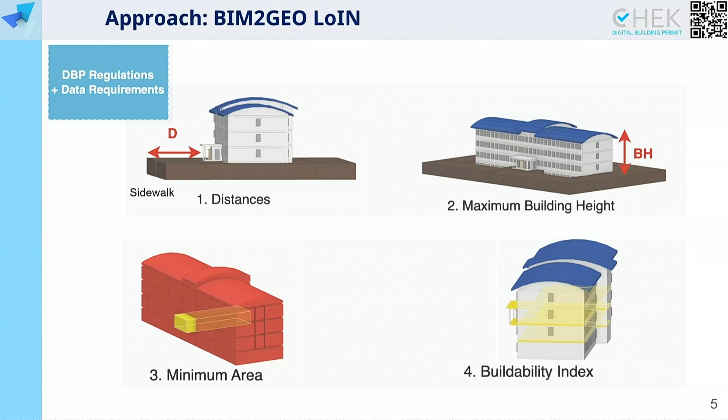So for that, we chose last year within the CHEK project, within University Brescia and Minho, to focus under the feedback of the community of practice of the project on 4 main regulations: distance to buildings, to sidewalks, the maximum building height within the 4 municipalities, minimum area, and the buildability index, which I need to explain more—like the potential of a land or building to the maximum usability. It can be translated as a data requirement based on the ratio of area to area, or volume to area, which takes the maximum usability of the building.

After this stage, we detected 5 concepts and 5 solutions in order to make this process implemented. The first is detecting the accuracy based on the tolerances of the 4 municipalities, urban ones, in order to detect what level of geometric detail is needed as input during this process. The georeferencing was made through my teammates' solution developed with IFC-GRF, which is a tool—I'll give you the links on GitHub. We also have a website where you can implement your IFC model. It supports the 4th version, 3.2, and you can georeference it based on the IFC map conversion to the city level.

We have the building envelope extraction, which is based on the voxelization approach. It approximates the envelope of the building to its accuracy, in order to extract the elements needed to compute the buildability index and maximum building height. One of the key elements checked until now are georeference accuracy, building envelope extraction, and floor extractions. The last two are space extractions for the minimum area, and facade alignments, in order to say to what accuracy the overhangs need to be extracted to align with the data requirements of the inputs. These two are still undergoing and not yet checked at the geometry level.

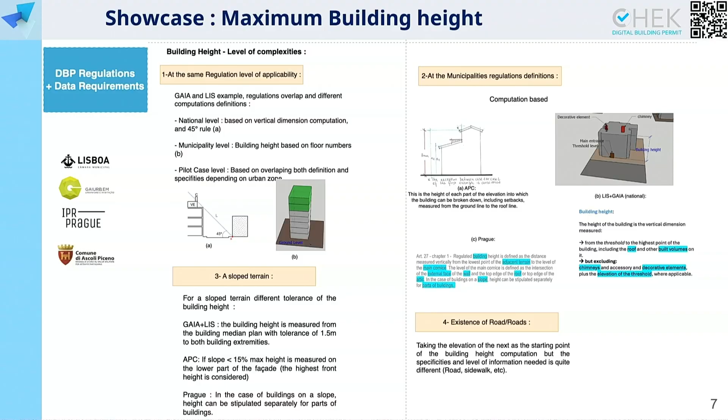What we detected is, for example, at the same level of municipality, you have an overlapping applicability of the regulations. You find out that the maximum building height can be defined either by the maximum floor levels, or by the computation from the lowest ground level elevation to the roof elevation. It can go beyond that in terms of complexity—whenever you have sloped terrain the approach is different, and whenever you have roads involved it becomes overwhelming. We chose one simple case for this study.

We had the example of the municipality of Vila Nova de Gaia, provided by one of our partners, the design architecture company Zvei, in IFC4. We checked specifically with my teammates how far the geometry is validated.

For example, here we can see how far we have these elements structured for the data requirement. We need to provide IFC walls, IFC wall standard cases, how far the IFC coverings are structured—not under proxy elements, but as IFC coverings, etc.

During this process, we used, after the georeferencing, the building envelope extractor, based on the solution provided by TU Delft. The output of the computation is the outer shell based on the voxelization approach, which is as you see, and by the end we have the modeling requirements that are given to designers.

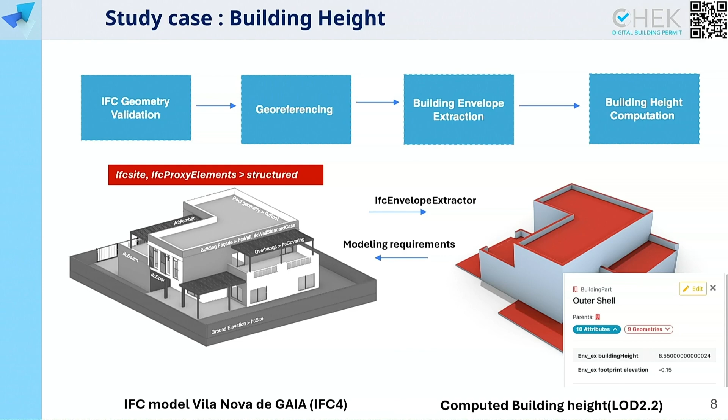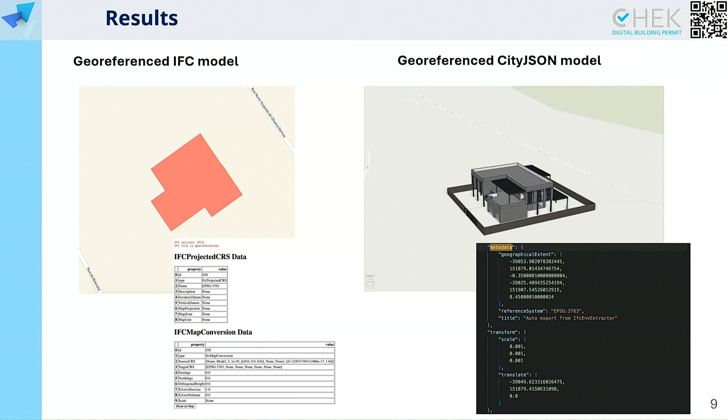One of the challenges we faced is, for example, that IFC sites was not structured, so we couldn't have the separations during the conversions, and also IFC proxy elements with coverings which crashed the geometry during conversion. So here you see another challenge during this study case: storing the georeferencing data in the output City JSON file based on the conversion.

So finally, to sum up—I don't want to say it's all rosy and glittery. We have ongoing efforts, but there are many challenges and research lessons learned. On a positive note, the ongoing work is to upgrade our solutions, the converter, to include the complexity of indoors, IFC spaces, and facade alignments, and to finalize the data requirements into a machine-readable format with our partner OGC, in order to have all the data requirements based on LoIN, and assist and complete the implementation of regulations within our software partners during this process.

And I will change my umbrella—under the coordinator umbrella, we have other problems. In order to have more scalability, we still need to navigate the complexities and finalize the LoIN process, provide more IFC model structures, which will be provided by our designer partners, and municipality data collections. And I will insist—this is key to success—we need to get back to them and do a second phase of data collection.

One of the lessons learned is that we need more accuracy beyond the process itself. We need to define how far the accuracy should be between human and digital during the process, and we need more practices and use cases to demonstrate how far this approach is feasible or reproducible. I'll finalize by saying that flexibility is also key to maximize innovation in the digital building process. Thank you.

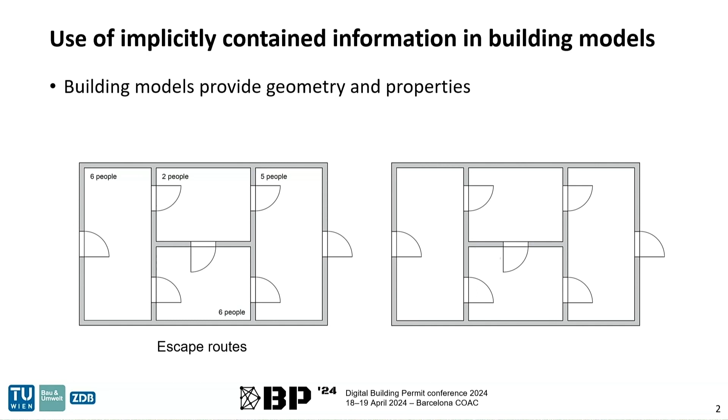So when we have a look at escape routes, besides the geometry, a very important information is the occupancy number in spaces. Because in building regulations, normally the dimension requirements for elements along escape routes, like corridors or doors, are dependent on the summed up number of people that pass such an element, and they come from different starting positions. So it is a crucial information for escape routes, and it's usually already in building models.

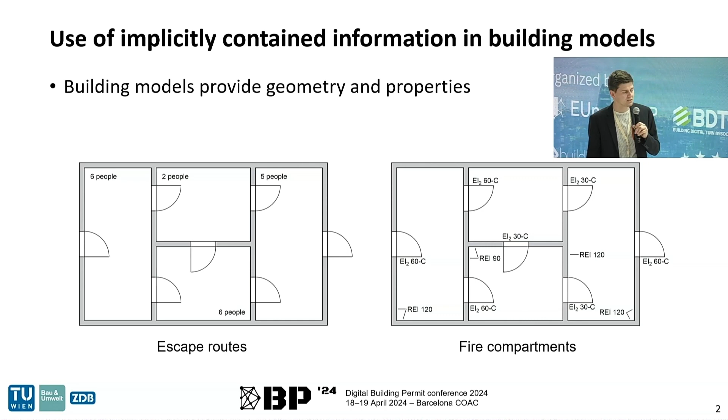When you have a look at fire compartments, interesting for us is the fire resistance of the boundary elements. So in this example, we have fire resistance information on walls, and also for doors. The interesting thing when we have this implicitly contained information and want to generate virtual elements from it is that the data allows different options. As we can see here, this geometry allows 4 different escape routes from the left to the right. Of course, one escape route goes through a door in the wrong direction, but in some cases, if there are not too many people, this is also allowed, in Austria, for example.

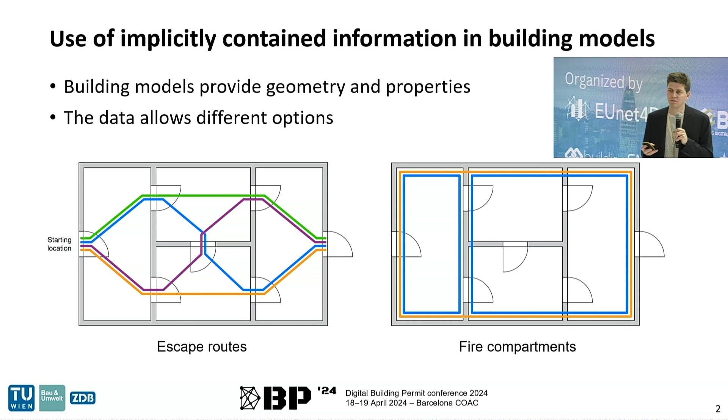So when we think of a complex building with several starting positions, with several escape routes, they all have different options, so we get a lot of possible combinations of these escape routes. Then when we look at the fire compartments, I displayed here only 2 of 8 possible fire compartment configurations for this geometry, because it would overlay the image. But as you can see, there are also many different options for this problem. And the point I want to make here is that when we use the implicitly contained information, we have different options and don't know which one is the best or which one is intended by the planner.

So let me state this formally. This is the validation of elements that are not explicitly defined in the building model, while the implicitly contained information allows different options to generate them. So this was the challenge we faced here. We discovered 3 approaches to handle this challenge. The first one is the fully automated generation.

With an iterative algorithm, it is possible to find all possible combinations. But in Austria, we have a problem there because this would represent a liability reversal. In Austria, the party that defines an element is liable for it, and we require the planner to do that. Otherwise, the building authority would be liable for it, but they only validate it. So this is very important in Austria, that the designer or the planner defines the actual course of the escape routes, or, for example, the configurations of fire compartments.

The second option would be to explicitly model these elements again. But with this, we would have, on the one hand, redundant information, because the information is already in there and we still model it again. And second, we lose the advantage of the implicitly contained information because we don't use it. Instead, the whole planning of fire compartments and escape routes is done beforehand.

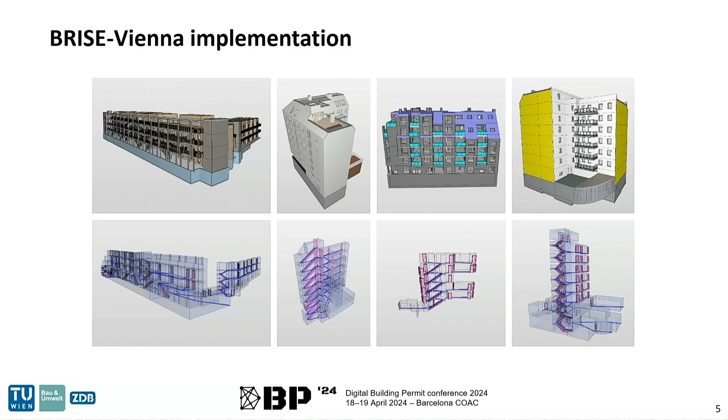We implemented this concept in the BRISE-Vienna project as checking rules for the software Solibri Office. We implemented algorithms for the indoor navigation model, pathfinding algorithms, and checking algorithms for the elements. And then we validated the approach with 16 real-world models in the pilot phase. And these are the results of 4 of them.

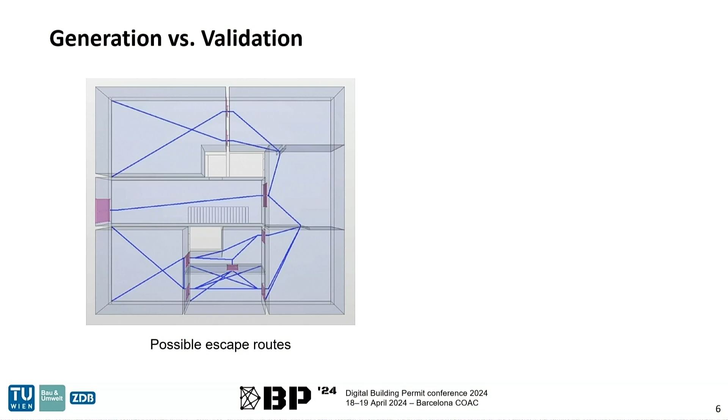So let's just have a quick look on the differences between the generation and the validation. Here we see the results of one of the generation. In the bottom space, you can see there are many different escape routes for just one space. And here on the right, we see the selected escape routes.

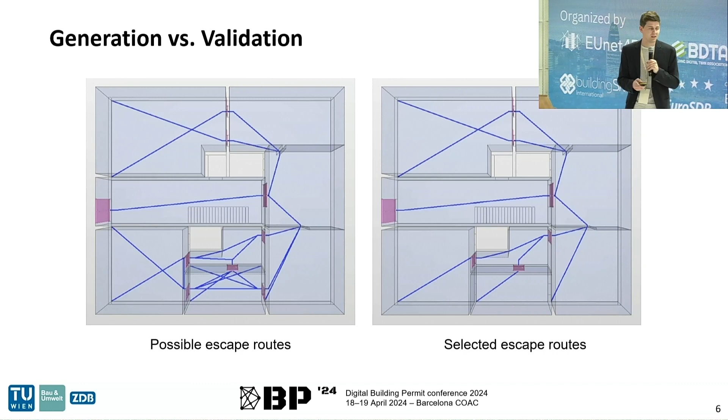And this manual selection process, as I mentioned before, is done in this concept for escape routes with an additional property in a door that references the next door. So to select escape routes, the applicant, the designer, references the next door on the escape route, and then the validation uses the same algorithms as the generation, but just from door to door, to regenerate the selected escape routes.

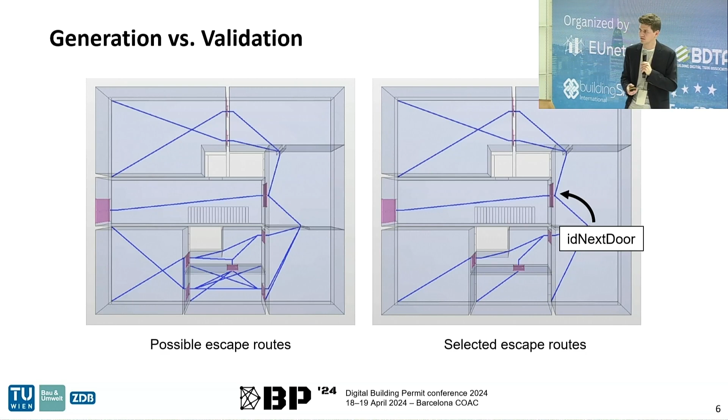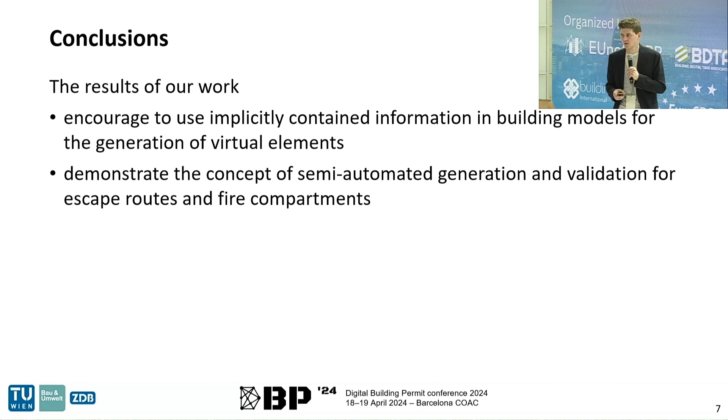So to sum up our results, they encourage to use implicitly contained information to generate these virtual elements. We demonstrated this concept on escape routes and fire compartments. So for these 2 use cases, it actually works. So we showed that it worked. And we are consistent with the legal framework in Austria. Last, we also provide a single source of truth because we use the implicitly contained information. So this cannot contradict with the information then on the escape routes, for example.

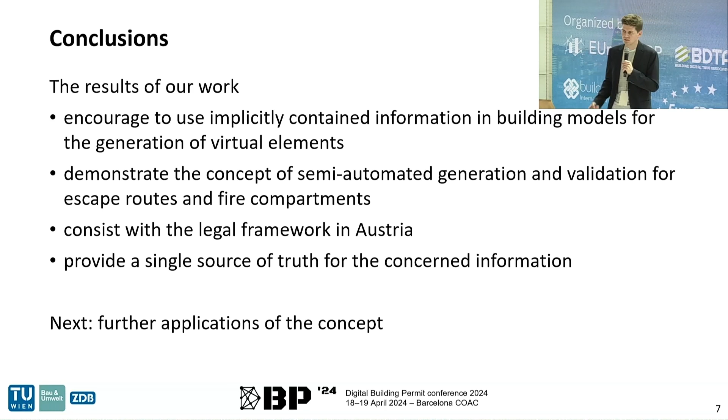So what is next? As I said, we demonstrated it for 2 use cases, escape routes and fire compartments. So now it's time to screen more regulations, for example, to see where this is also applicable or where this challenge also exists.

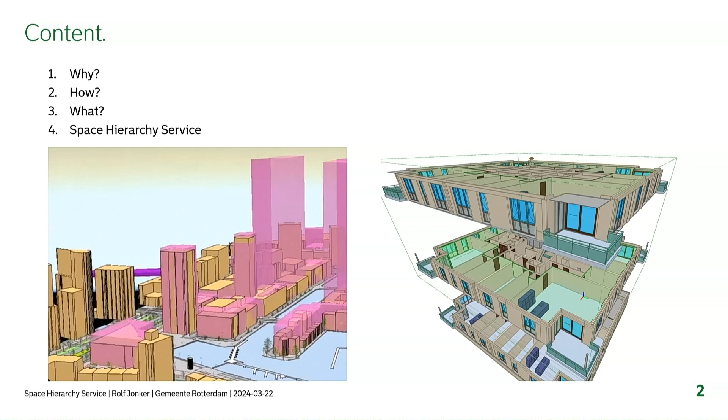I will tell you why we make a space hierarchy service, how we did that, what are the results, and I will give you some print screens of the space hierarchy service that we developed. But first, why? In Rotterdam, we are working on a digital building permit service, and the space hierarchy service is developed in that context. The building permit service relies on three important components. It's the BIM model given to us by a project developer. The second component is the digital city that we have as a municipality. And the third component is machine-readable legislation.

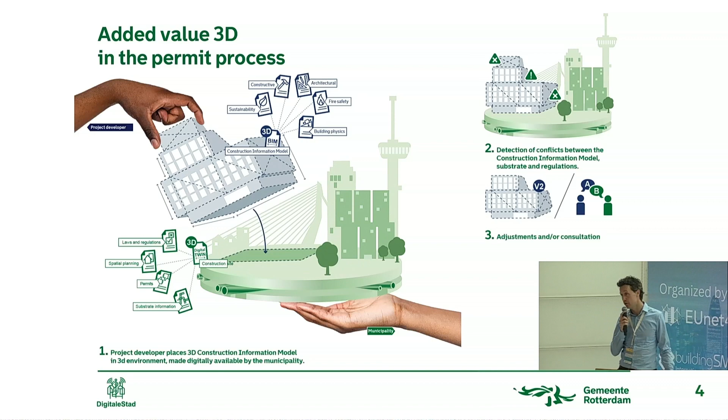And if you combine those three, then you can detect some conflicts. And we believe in Rotterdam that after we detect a conflict, we have consultation for adjustment. We don't want a service that is like the computer says no. And then we hope we can reach appropriate design.

Goals that we have on short term for the space hierarchy service are to create knowledge, to research, reach consensus on space modeling, make it human and machine readable, improve the process, and increase the job satisfaction of the modeler. And it has to contribute to the Environment and Planning Act, and these are the long-term goals of the new act. And we hope it can contribute to added value for the city of Rotterdam and residents, and hopefully also for other cities and other organizations.

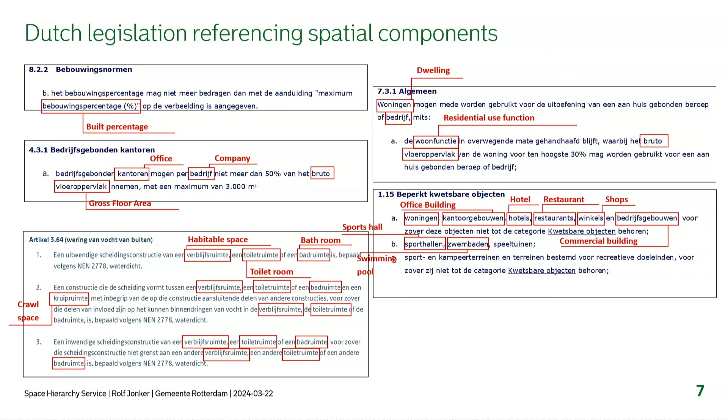So we're looking for space, and when we're looking for space in our legislation, it's referencing spatial concepts. It's a Dutch rule, but here it's talking about the built percentage. It's a space type. It's talking about office, companies, gross floor area, habitable space, toilet room, and so on. So if we want a machine to help us check the rule, we have to explain what these spaces are.

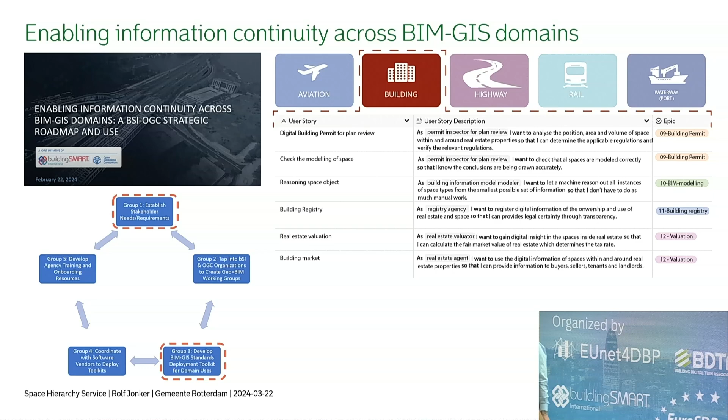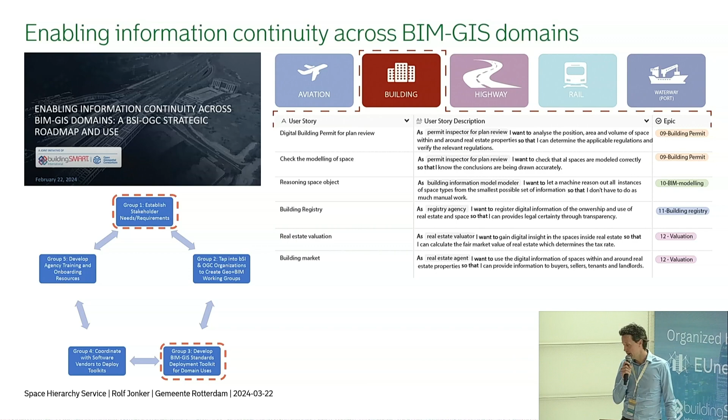And those spaces are sometimes in the BIM domain, but sometimes also in the GIS domain. And we hope we can exchange the knowledge with the roadmap of buildingSMART and OGC, who are trying to enable information continuity. And I think we have a use case, so group 1 would be interesting for us, and also group 3, development of BIM GIS standards. And we made a user story of our service. So how did we work on the space

standardization? What we're trying to do is to take a term like habitable zone, what is the space type, and align the semantics for human-to-human communication, human-to-machine, but also machine-to-machine communication where a human is not involved anymore. And to do that, we make use of the IFC schema, the IDS, and also a Dutch standard, the NEN 3610. Our GIS information models are based on the OGC and W3C standards.

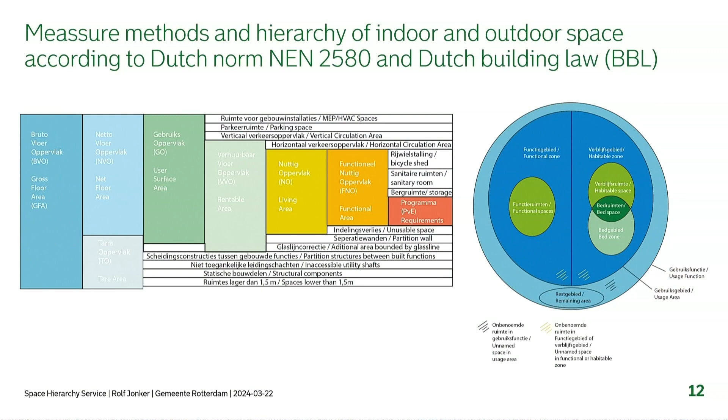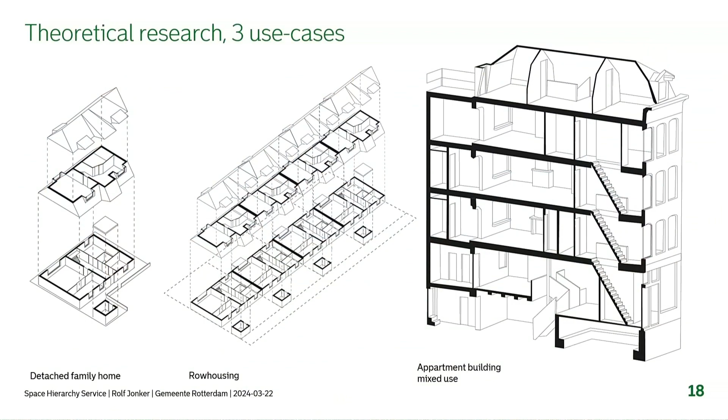And we also make use of the space hierarchy given to us by our standardization institutes that you see on the left side. So it's explaining what is gross floor area, what is net floor area, etc. And on the right side, you see it's more like a hierarchy. What space is part of another space? So we looked at 3 theoretical buildings, detached family house, row housing, and apartment building, to detect what kind of space is inside such a building. And it's a lot.

So you see site volume, but also habitable space. So we tried to standardize the type, and not only in and around the space, but also the administrative spaces. And they are mostly in the GIS domain, but sometimes also in the BIM. And what we see is that there is an ambiguity in the meaning of a space type. So when we're talking about a gross volume, it can mean different things, and that's the problem. So we classified that, so it's not an ambiguity anymore.

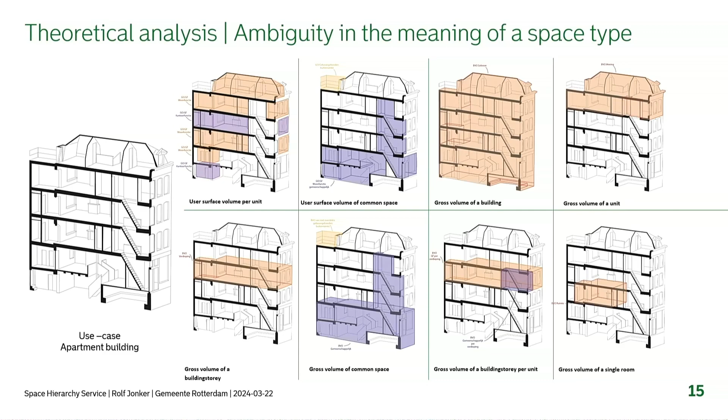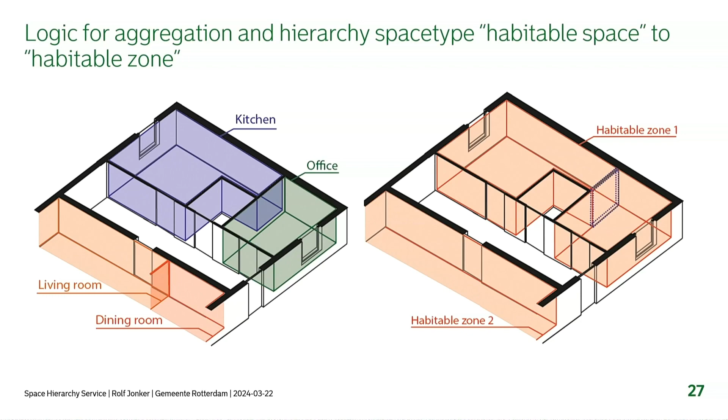So to reach that, we made a large model of what space types are and how they are related to each other. And here I'm showing you just a small part of the model. And after we had the space types clear, it's possible to make logic to go from space type A to space type B. And in this example, you see a living room, dining room, kitchen, office. They are habitable spaces, and we can combine them into a habitable zone. But if you look closely, you see that the non-load-bearing separating wall is part of the zone, and that's a large problem.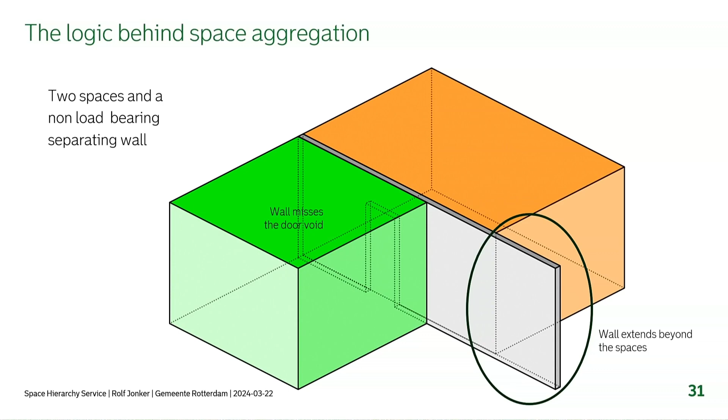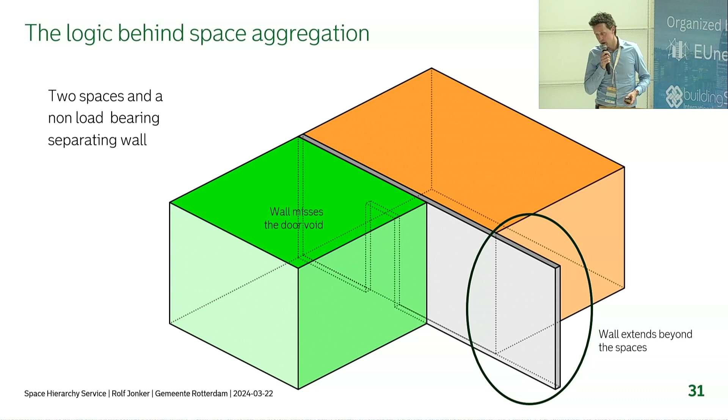And to create all the spaces that we need, we defined a minimal set of IFC data needed to create all the spaces I showed you. And it's a minimal set because we don't want to place a burden on our modelers that have to give the BIM models to us. So what did we do? This is an example of what we make. We have 2 spaces and a non-load-bearing separating wall in between. And you see that there's a problem because the wall can extend beyond the spaces, and there can also be a part of the wall missing because there is a door void.

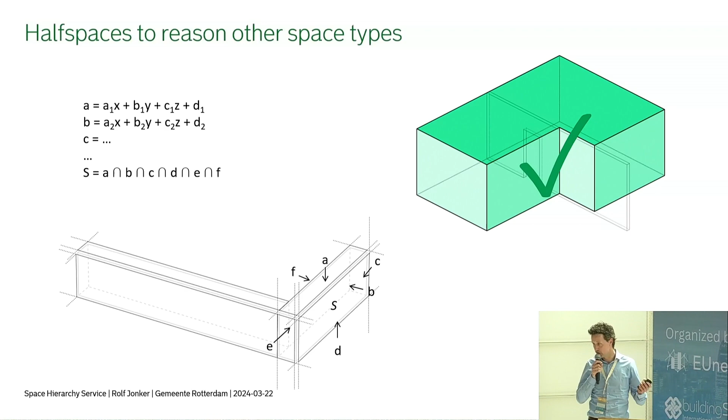So we cannot use the common Boolean operation, like combining those 3 geometries, because then you get the wrong solution. So what we did was another approach developed by Thomas Krijnen, where we use half spaces, that is like a boundary of a space, and we're looking for the intersection of the half spaces, and then we can reach the right space as a new space type. That's an aggregation of other space types. So here you see how it works. We have 2 spaces. It has a relation to its space boundaries, its half space types, and so when we analyze that, we can make other spaces out of that.

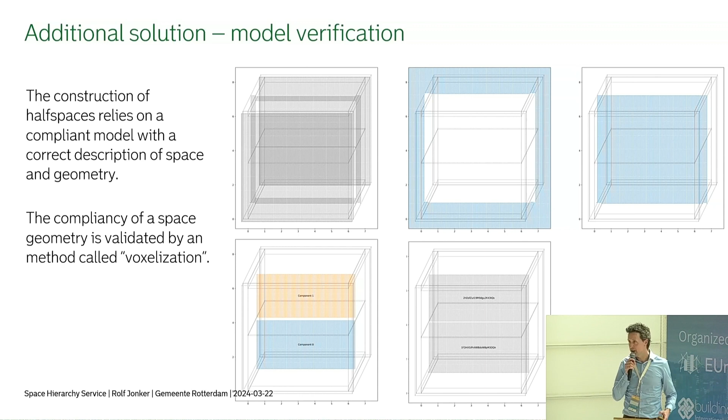And the service that we make relies on a compliant model, and not all models are compliant. So what we did was an additional solution that uses voxelization to check if there is a space modeled inside a space found by the voxelization method.

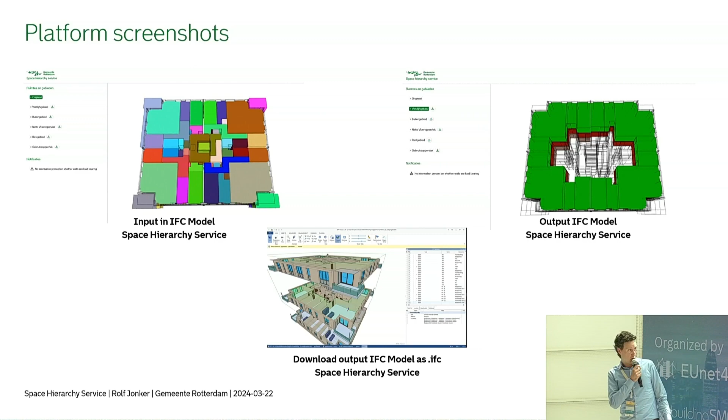So this is a sneak preview screenshot of how the space hierarchy service works. On the left side, you see the input model. It has a lot of spaces in it. And on the right side, you see the aggregation of the spaces. And when you want to work further on your model, you can also download it and put it back in your modeling software.

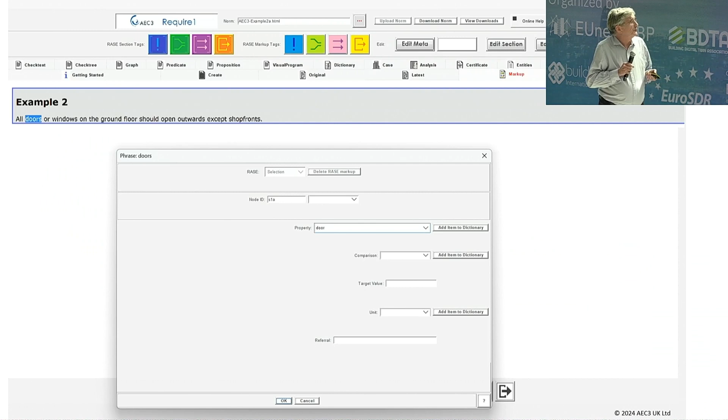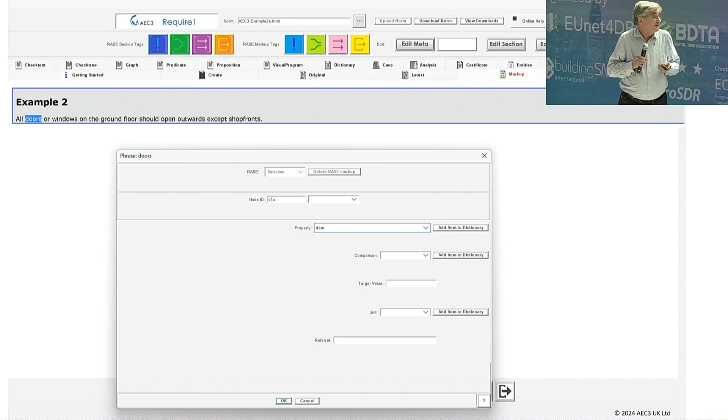I've highlighted the first word, I've hit one of the electronic colouring pencils at the top, and I can, if I want to, fill in some extra detail, but I don't have to. I normally give each piece of information an ID. That could be automatic. But in fact, the only thing that I do here is I say that doors means door in the singular. One of the strange things about language is that we mix up plurals and singulars all the time.

Okay, so we finished the markup. And above the markup, we have something like 15 different tabs. This is why I call it a workbench. Only 3 of them are interactive, and the rest are reports and results and analysis.

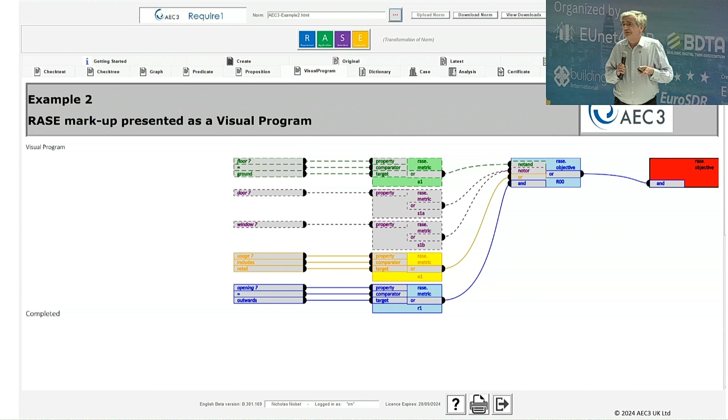One of those reports is it can generate a visual program, Dynamo or Grasshopper or whatever it happens to be. So if you're really into visual programming, we can write it for you. If, on the other hand, you're a little bit more abstract, you can have a conceptual graph. This is following the work by Solihin and the Singapore regulations.

Again, carry on using the same colors because I like those colors. I've been using them for 15 years now. So if you've got someone who wants to think abstract, they can see a concept graph. And of course, for real regulations, the graph can spread over, well, I'd need the whole screen, of course, for some regulations.

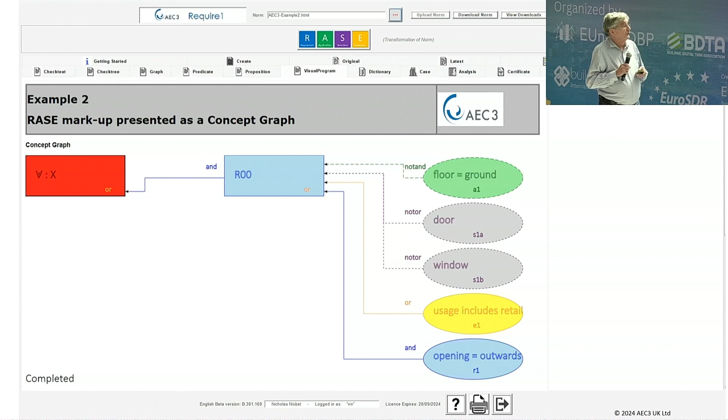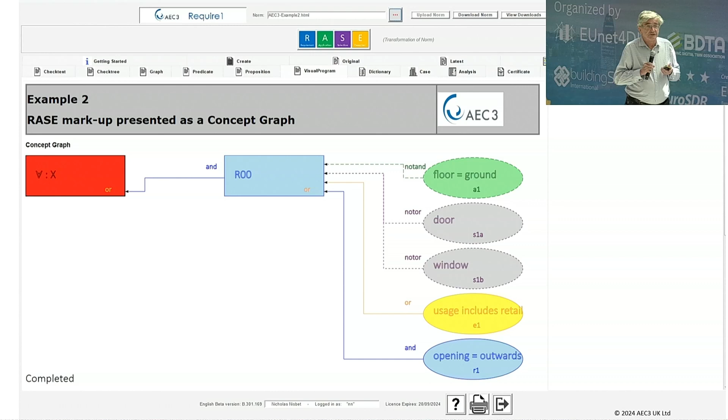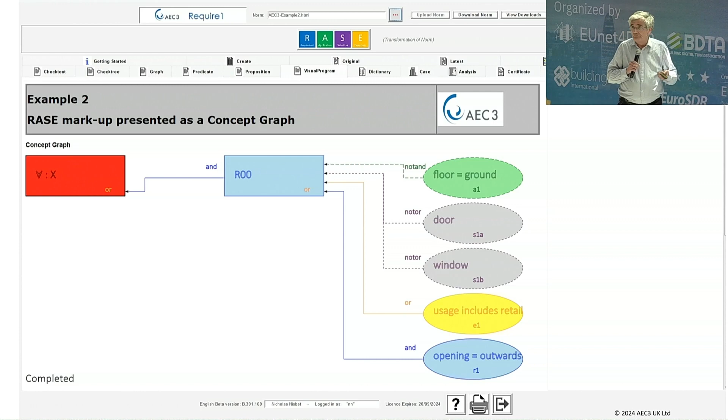But we can also play it back as first-order logic statements, predicate logic, propositional logic, visual programming. Oh, we've seen that. Lots of other things. Also checklists. We can play it back as a checklist, which is a dynamic checklist. So even if you haven't got a BIM or a GIS model, you can give the regulator a copy of his regulation.

Okay, so next thing, we're going to do some definitive work. We're going to set up an example. We're going to name the models that we want to test and the regulations we want to test. And we can have several models in there. We can have several regulations. And then, in this case, one of the things we can generate is all possible test cases. Now, that simple regulation with 5 metrics in it actually has about 200 and something possible test cases.

I'm bone idle, so I got the machine to generate all the test cases in one model so I could check them all. So again, we can pass back and reassure people that the engine is getting the right results. So that's the model we're going to test. And it comes back saying some of these have passed, so it lists the ones that have passed.

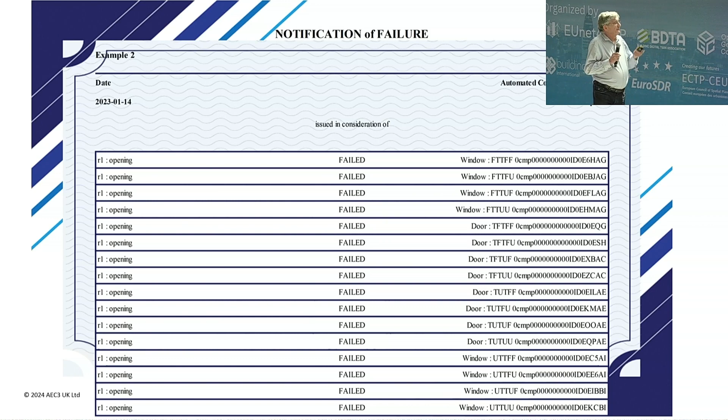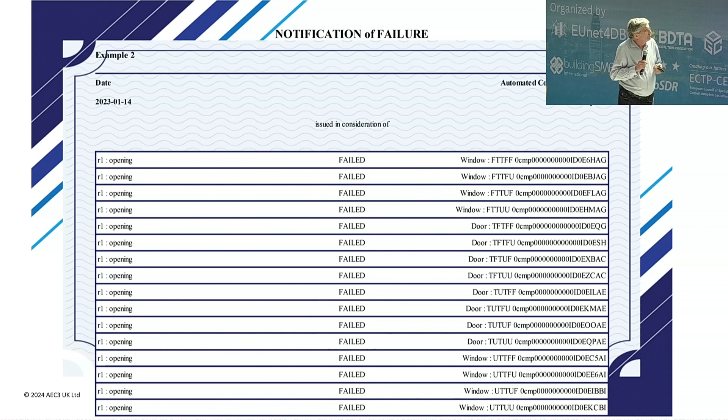Much more excitingly, we get a list of the things that have failed, or not, sorry, next one. List of all the ones that have failed, all the way down there. If it had been successful, I would have got a certificate saying you may go ahead and build this building. But this is a notification of failures. We can also generate the explanations of what you would have to do to fix them. And that uses a technique called logical differentiation. Look it up in Wikipedia when you can't sleep.

Okay, so in summary, the AEC3 Require 1 software has been tested in a project called RegBIM, which looked at one accessibility clause, the whole of BREEAM, and also a government policy called the Code for Sustainable Homes, which was actually cancelled whilst we were automating it. And that tells you something, that regulations are dynamic. They come and go, they change. We've got to be able to automate them quicker than the regulators can introduce new ones.

We've used it in the DCOM digital compliance projects, where we implemented 3 of the approved documents, the regulations in the UK, on fire, energy, and accessibility. And we've also used it with the Health and Safety Executive in the UK to do live checking of health and safety on building sites.

So I think the lesson about RASE is that it abolishes programmers. We can have lots of different presentations of normative knowledge. We can manage the declarative knowledge and the dictionaries we use. Also, semantic enhancement is a kind of declaration of how you think things should be. And we can get results and explainability from

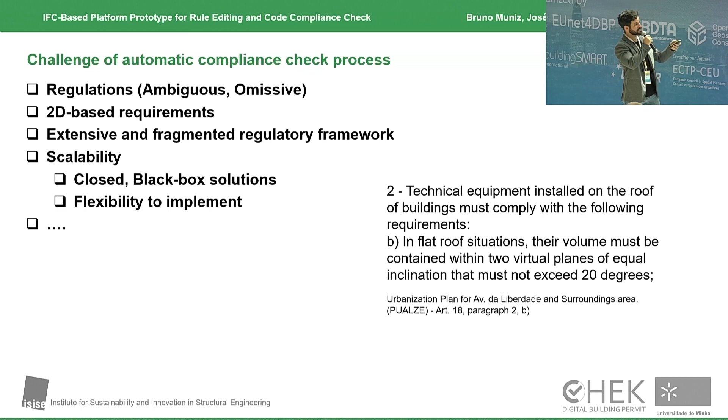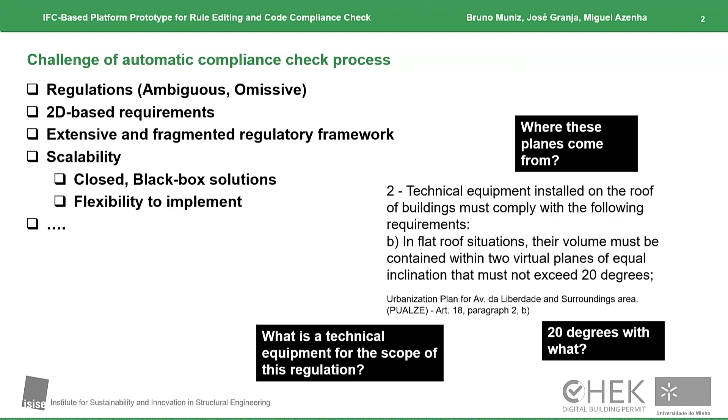For example, I extracted one clause from a Portuguese regulation, and I'm just going to show it very quickly. It says the technical equipment installed on the roof of buildings must comply with the following requirements, and requirement B is: in flat roof situations, their volume must be contained within 2 virtual planes of equal inclination that must not exceed 20 degrees. But the thing is, where do these planes come from? What is the technical equipment for the scope of this regulation? 20 degrees with respect to what? So we have a lot of information that is needed in order to make this objective, and in order to apply and implement this automatically.

Another factor that I want to address is scalability. We have a lot of regulations, an extensive regulatory framework, and for some municipalities we have several levels of regulations, which makes it very hard to implement these several regulations. So we have to tackle this in some way.

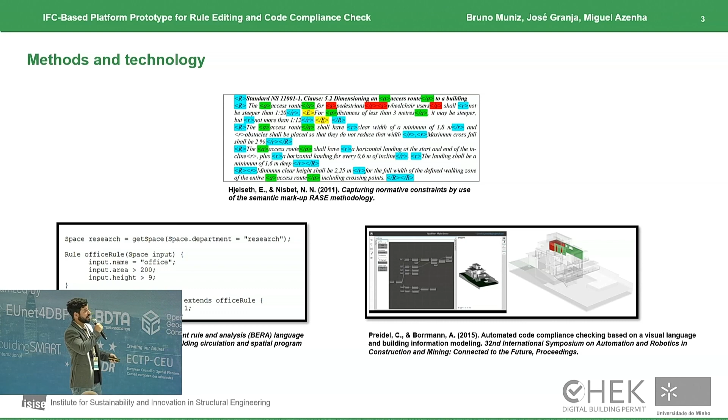We have a lot of methods and technologies so far to help us address these challenges. Here we have RASE, which helps us extract information from the natural language of the regulations. We have BERA, for example, a domain-specific language that enables us to work with BIM models, and also a visual programming language that makes it easier for non-coders to start working with these regulations and coding rules.

So our work was to look into all of these methods and technologies and set some cornerstones in order to create this platform prototype—a platform prototype capable not only of creating the rules, but also of checking the models based on those rules. I would also like to point out that it was made within an open source framework.

We also wanted the rules to be created based on local permitting concepts. So instead of working directly in the model, we wanted to create rules based on concepts such as parcels and alignments, that would make it easier for the technician in the municipality to know what they are coding for. For that, we were able to do this by creating a high-level model.

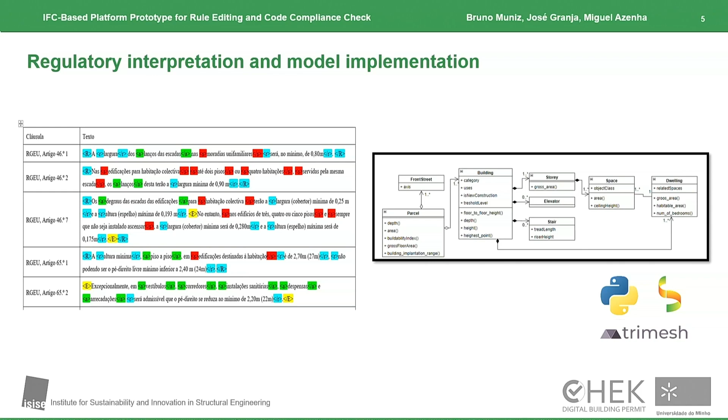This model was conceptualized based on work we did on several clauses of the Portuguese regulation. From that, we extracted the entities and objects needed to execute these verifications, and implemented this into a series of classes using Python. We also used tools such as IFC OpenShell and TriMesh that enable us to map these concepts and entities, these classes in Python, to the model using geometry processing. With that, we could work inside Python, not using the IFC classes directly, but instead using the concepts of the regulations.

So actually, after the implementation of the model, it was quite straightforward to create the visual programming language. We used the Blockly library, developed by Google, to create the visual programming language and generate the code we wanted. We developed a series of blocks based on the concepts we extracted, plus several auxiliary blocks to enable the logic, rules, connections, comparisons, and so on.

Behind the scenes, the connection between the front end and back end of our application is done through a REST API. We have a machine-interpretable format in JSON that contains the Python code created using the Blockly language, incorporated within this JSON format. This lets us pass the information to the backend, where everything is processed and returned via the REST API to the front end, where we can show the verification results in a web viewer.

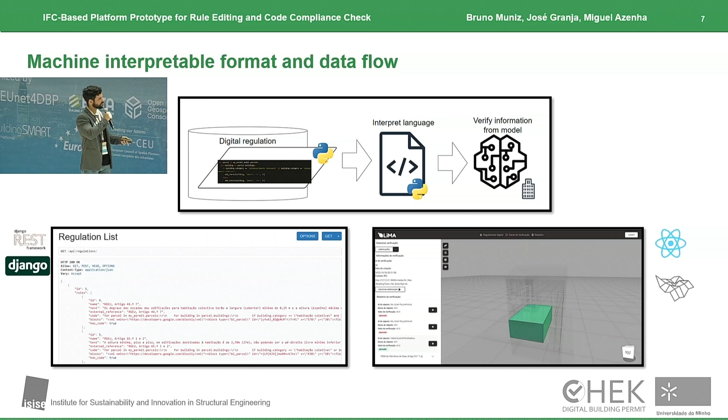Here I'm going to show a video of everything working as it is right now. So first we can create a digital regulation, which will be this box of rules that we can create. We have some information here.

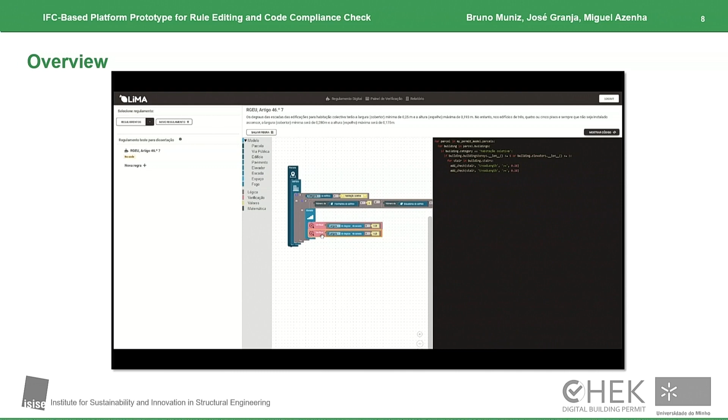Then we can use the visual programming language to create several rules using the blocks we make available. You can see here in the right panel that the Python code is generated simultaneously using these objects and the model we implemented. These blocks can be rearranged to code several different clauses, and you can see here some different clauses.

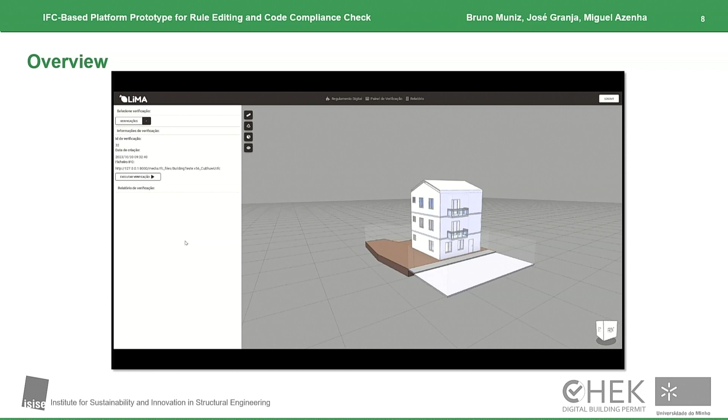Then we can create new checking records, so we can connect the IFC to several regulations we want to check, and send this to execute at the backend. All information about the model is executed and returned in the format of a report where we can check the groups of objects that are compliant or not. So this is very simple, and we wanted to keep it very simple.

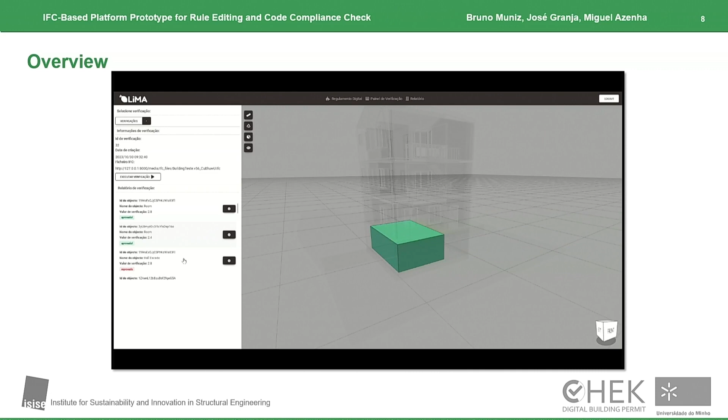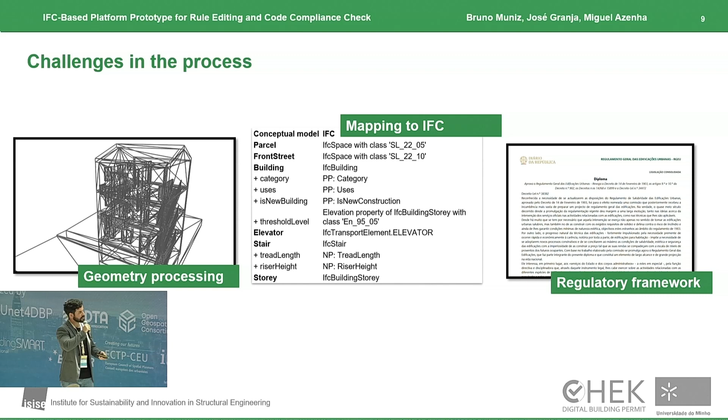We found some challenges in the process, and we want to emphasize these. We tried to use geometry processing to map these abstract concepts of the permitting process to the IFC model. We think that's the right way in a lot of cases, but this implies a very heavy challenge in some cases, and we thought this should be further investigated.

Also, mapping to IFC is difficult because often we won't find a one-to-one relation between a permitting entity and an IFC entity, so we have to find other ways to do this mapping, and classification systems could be a good way to do that.

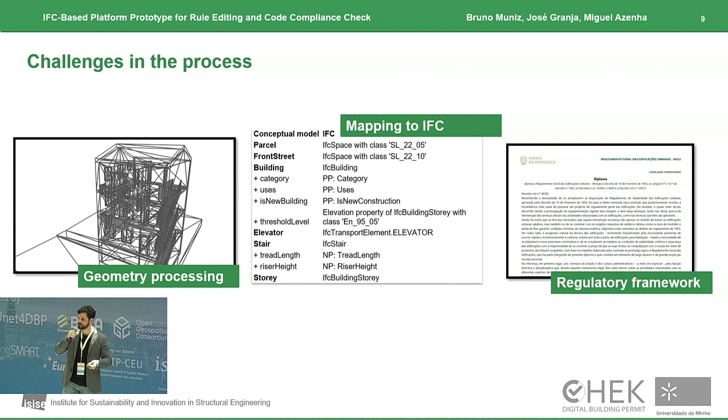Also, regarding the regulatory framework, it was clear to us that we would need to rethink some of the clauses and regulations we have, not just in terms of 2D-based regulations, but how we could verify and establish requirements for urban planning with all these new tools and new ways to portray information.

So the conclusions are mainly that we've developed this platform and are capable of making it accessible to non-coders, so hopefully technicians can create, manage, and edit new rules. The implementation of local permitting concepts in a high-level model brings rule creation even closer, since we wanted to make the concepts available in a way that matches their regulatory framework.

The expansion of classification systems, as I said earlier, is a way to map those concepts more efficiently with the IFC model. Executing verifications based on geometry processing can also make everything more consistent, but it's also a big challenge. The way toward a more automatic compliance check process involves updating the regulatory framework. So that was basically it.

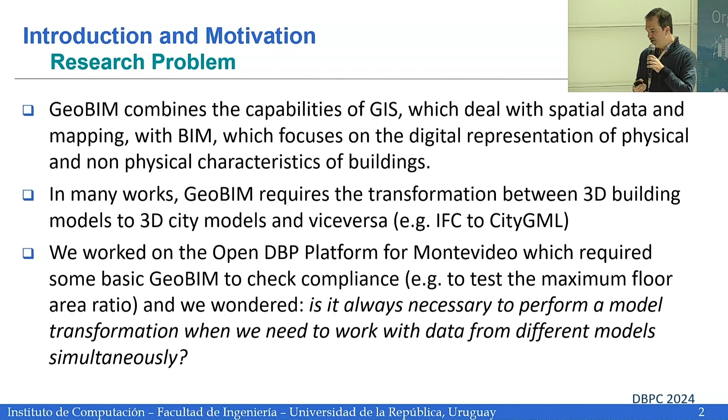I'll just mention that in this platform we have the AEC applicants who submit an IFC file. Then the platform checks some requirements, a subset from the regulations I mentioned, and if some issues are found, they are reported back to the applicant.

In this platform we work only with files - IFC files, BCF files. But being computer engineers, we don't like files that much, we prefer databases. So we wanted to try a different solution, and that's why we proposed this proof of concept.

This has a middleware module that was implemented in Python. We didn't want to perform a model transformation because we wanted to try a different approach. Usually model transformations are done with ETL tools, so we wanted to keep each model separated.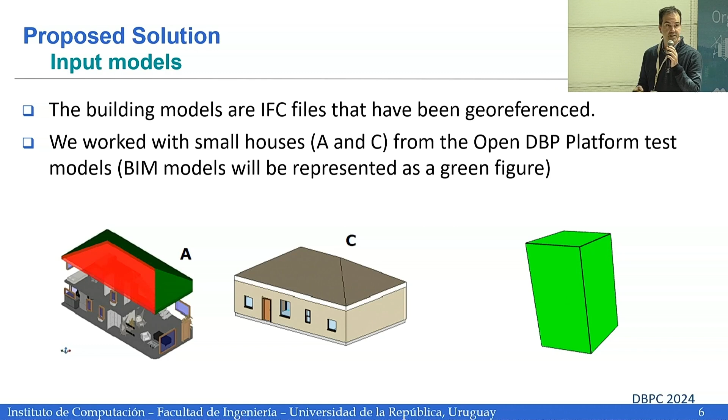Then we borrowed some test data from the OpenDBP platform, two simple houses, A and C, that have to be georeferenced to work with the city block information we have. Those BIM models will be depicted in the next slides as a green box, like that one.

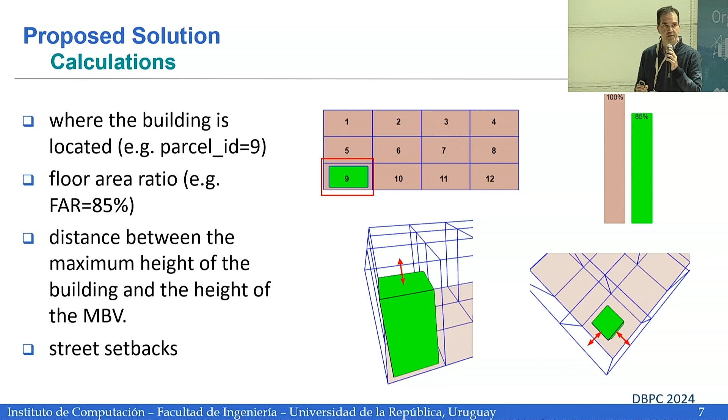Then we can calculate the floor area ratio, a distance between the maximum allowed construction height and the height of the BIM model that we have, and also the setbacks, that is the distance from some face to the property line. Those were the calculations that we performed with this module. And these calculations can be then used. We didn't do that with this proof of concept, but then they can feed the platform, for instance, to perform some rule checking and so on.

So to wrap it up, we confirmed the technical feasibility of this approach, that is to integrate information without doing a model transformation, and also to use some products like BIMServer and 3D CityDB that are not widely used right now, but we believe that in the future, as has happened before with vector data, for instance, database and service-based solutions will be more widely adopted. So maybe our conclusion is that those tools are not yet ready for prime time, but they are close to that, especially 3D CityDB.

And also, we concluded that some regulations can be verified with this approach. For instance, when we want to test the satisfaction of the floor area ratio. And for future work, we still have to decide or be able to decide when we really need to do an entire model transformation, and when we don't need it. We still don't know. We just tried for some simple cases that it was not needed, but for some other requirements, model transformation can make sense. So it would be interesting to know when we can follow one approach and when we can follow the other one. So thank you very much for your attention.

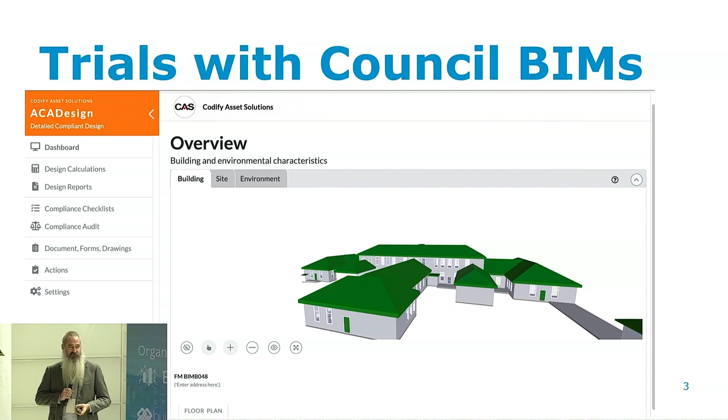We've been testing this with Christchurch City Council, one of the largest councils in New Zealand. And, God, it's problematic. BIM models are crap. We have never, ever seen a BIM model which complies, which has all the information that's needed, even though the council publishes the requirements for it. No matter who the architect or engineer is, they just can't give you the right information.

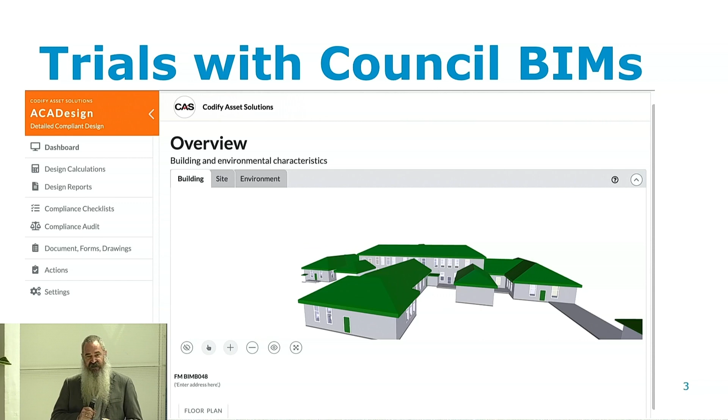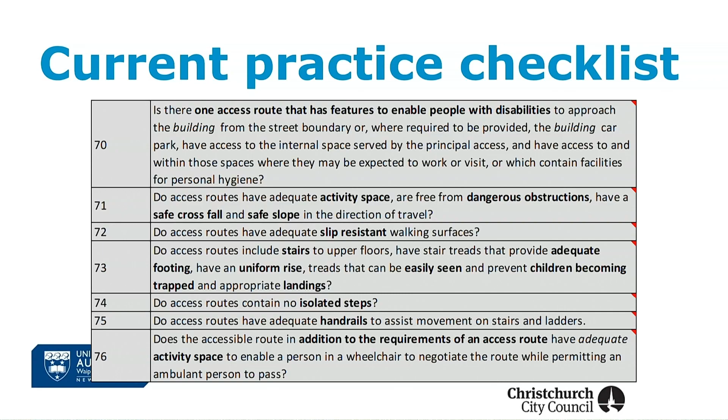So Tanya and others, we need that semantic enrichment. We need it now. There has to be other approaches to fix BIM models. I don't think humans are going to be able to generate it properly for us. As I say, the councils have the current approach of checklists, so we are using the checklists that they have, turning them into a process and doing checking, generating the functions which are needed for that, and we have a whole set of procedures which are defined.

Man, we wish these procedures were in IFC, so there was some standardization of how you calculate areas and all of these other things that everyone in the world has to do. Languages that Andre and others have been putting together, really, really necessary for us to be able to do the checking that we need to do of the IFC models that we have.

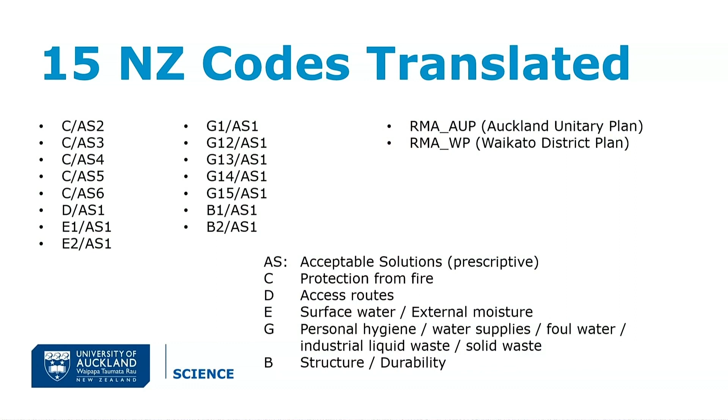Translated codes in New Zealand. So 15 of the codes that Christchurch City Council said were their priority codes. This is where they put the majority of their effort when they're doing the checking. So we've translated those. These are acceptable solutions. So this is the prescriptive form of our performance-based codes, so they are much, much easier to check.

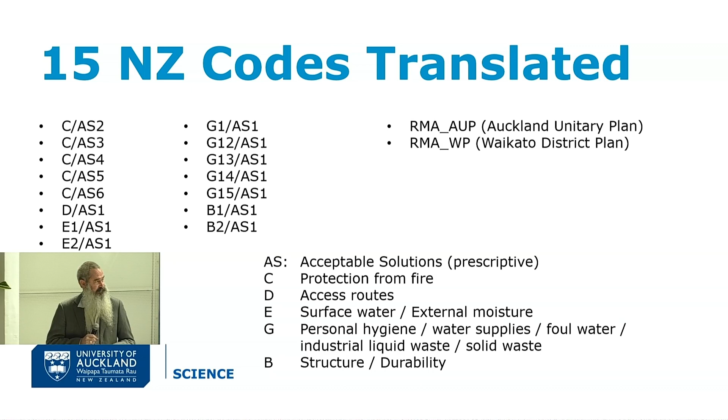In the 2 years since we put those codes together, 5 of them have changed, 3 of them have merged, 1 of them has disappeared. So this question of how do you keep up, who owns these codes and how do you maintain them is a really, really big question for all of us as we try and do this work. And then I have from our partner a demonstration, if our technicians are happy to run the demonstration. And hopefully there's audio.

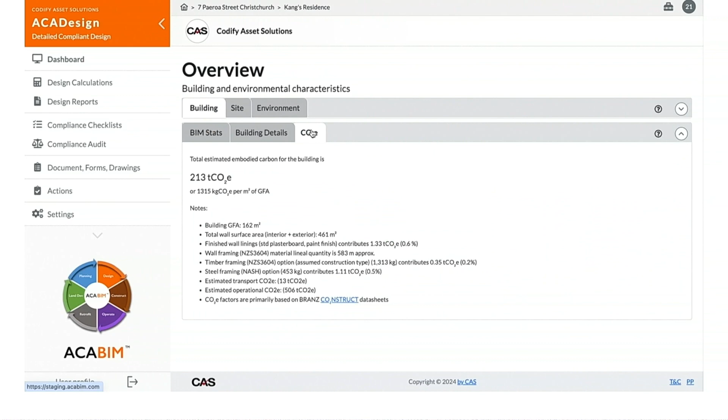6 different solutions for different phases of a project lifecycle, from land development, planning, design, construction, operation, and retrofit. Let's take a look at how the compliance checking process works during the design stage. First, select a project with IFC model to work with. Once the project is selected, you can look at various details of the building, including its embodied carbon. You can view the building models and look at various properties. This is a single-story residential building in the city of Christchurch, New Zealand.

Let's take a look at a few compliance checking scenarios. Let's check the building for compliance by selecting a CAP. A CAP is BPMN compliant workflows that can query BIM data and legal documents in LegalRuleML. This particular CAP can be used to check if the vertical clearance of extractor hood above a cooker in a kitchen complies with regulatory requirements. The result is an OK in this case.

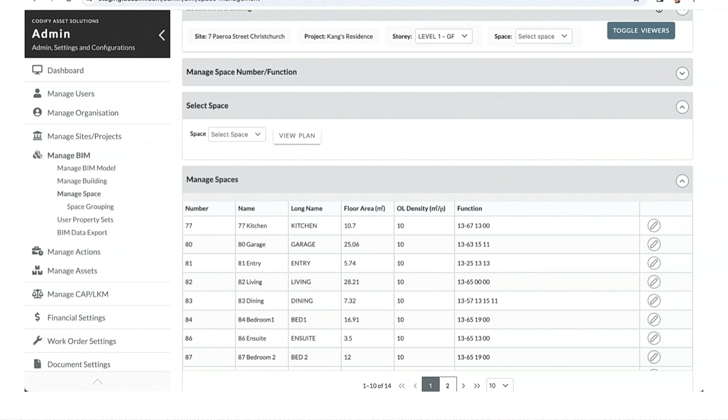Let's change some building parameters and see the impact on compliance. Changing the space function has the impact on the type of activity in that space, as well as the number of people that is likely to be in the space. Let's re-execute the CAP to see the impact. As we change the function of the only kitchen in the building to be an office, this results in no kitchen found in the building.

Let's look at a few more scenarios. We can change some of the user-defined properties such as cooker fuel type and extractor type. Let's re-execute the CAP to see the impact. We just changed the cooker type from gas to electric. The outcome of the check is no gas cooker found. Further check may be required for electric cooker.

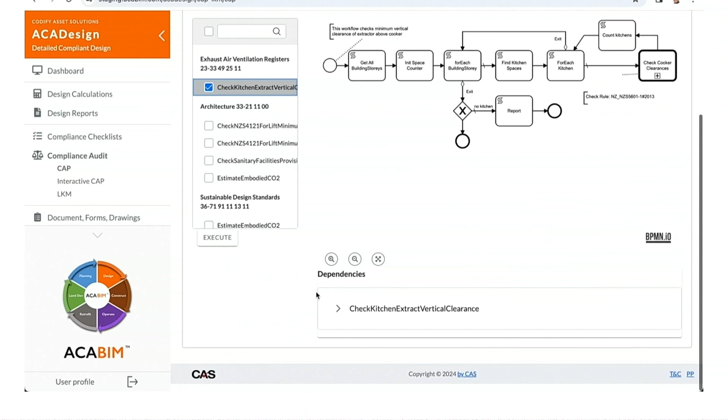Let's change the cooker fuel type back to gas. And let's change the extractor type to just a fan. Let's re-execute the CAP to see the impact. This results in non-compliance.

Let's change the cooker fuel type back to gas and the extractor type back to range hood, but also change the installation height of the extractor. Let's re-execute the CAP to see the impact. This results in non-compliance, as the vertical clearance is now less than the required threshold. Multiple CAPs can be executed together in a batch. Depending on the complexity of the checks, it may take a while for the process to be completed.

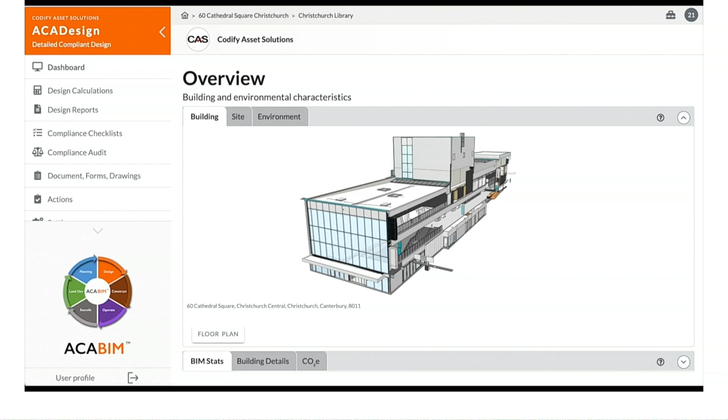Let's look at another example. This is a 6-story public library building in the city of Christchurch, New Zealand. In this exercise, we are going to check the building for compliance with accessibility provisions. There are several things to check, including minimum width of accessible routes, minimum capacity of stairs, and means of escape from occupied spaces. A few violations found.

One of the corridors has less than the minimum required width. One of the stairs has steps with the riser height exceeding the required threshold. Note that these violations are marginal and would be considered okay. Another violation is one of the spaces has less than the required number of doors. In this case, 2 doors are required to comply with the means of escape provisions, but only one is provided in the design.

Let's look at another example. This is a reasonably large 2-story commercial building in the city of Auckland, New Zealand. In this example, we want to know if a lift is required in the given building. The regulatory provisions have several parameters to determine if a lift is required. This includes the use of the building, the number of stories, and the number of occupants. In this case, the outcome of the check is that a lift is required given that the number of occupants on the upper level of the building exceeds the threshold for the type of occupancy.

Let's look at another building model for the same type of check. This is a single-story residential building in the city of Christchurch, New Zealand. The outcome is that a lift is not required as the building is a single story.

Now, let's look at how we can support compliance checking of performance-based requirements. Let's say we want to check the compliance with the means of escape from fire, which is to ensure all occupants can get out of the building in the event of a fire. This could be achieved by generating input data for the industry standard fire simulation application FDS. We also execute the appropriate CAP to generate the required input data. This CAP extracts the building geometry and spatial relationships for the purposes of FDS simulations.

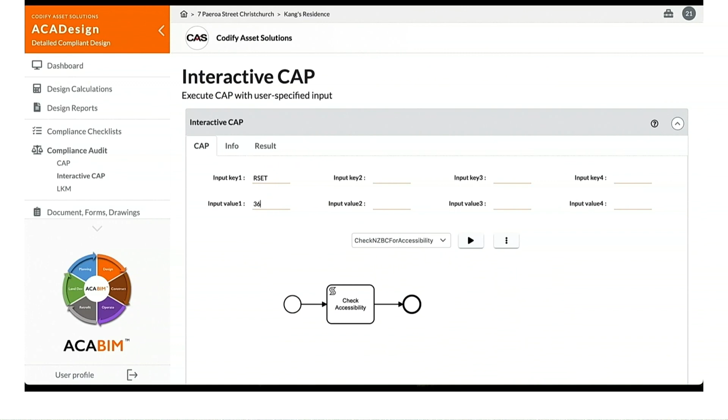The generated simulation input data can then be exported to the FDS simulation tool. Subsequently, the outcome of the simulation can be fed back into the CAP. This results in a compliance solution for the project. A PDF report on the compliance checking outcome can be generated if desired. ACABIM is developed by CAS Limited, based in New Zealand.

Okay, so just some very simple checks being shown there, just to give you an idea of what's there. We roll them all together and we can check a particular code, the complete code, if we need to. And as I say, this is a tool that hopefully will work for New Zealand's requirements and anywhere else in the world where you have open specification of your rules and regulations and your processes.

Yeah, hi, hello, I'm Gazbin from INS. I have a question in regards to maintaining the rules which are part of your compliance check. How are you handling the upgrades and changes that the regulations are imposing on you? We're trying not to. We believe the rules and regulations should be maintained by the regulatory body, not by a software development company. So in New Zealand, we're trying to have the standards specifier holding those rules and updating the rules as they change their regulations.